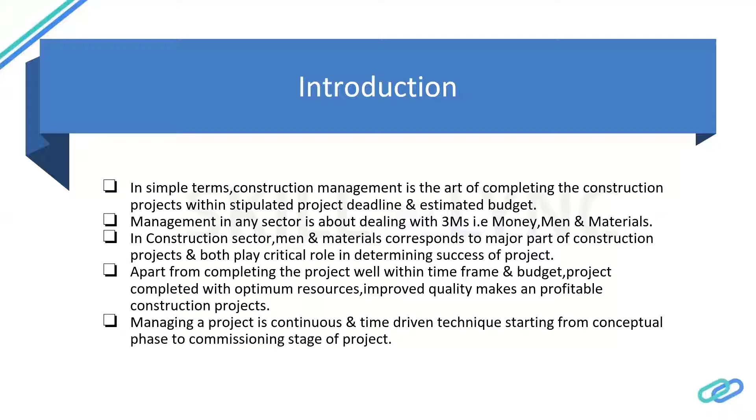What are the characteristics of a construction project? Every construction project is unique in its nature since it has different constraints and different site conditions. A project should have a definite scope as well as objective, and it can be divided into specified tasks, often termed a work breakdown structure. These tasks should have a specific start date and end date, a definite outcome, and require resources like man, material, and equipment.

Types of construction project: first is residential construction project. These types of projects include single-family apartments, flats, residential buildings, bungalows. The owner can be an individual builder, a contractor, or a joint venture, and it does not require much technical skill for execution. However, these projects do need proper licensing and authority for clearance.

Next is commercial projects. Commercial projects are multi-purpose buildings like office buildings, shopping malls, institutions. These depend on market conditions and capital requirement, and require much architectural and engineering expertise.

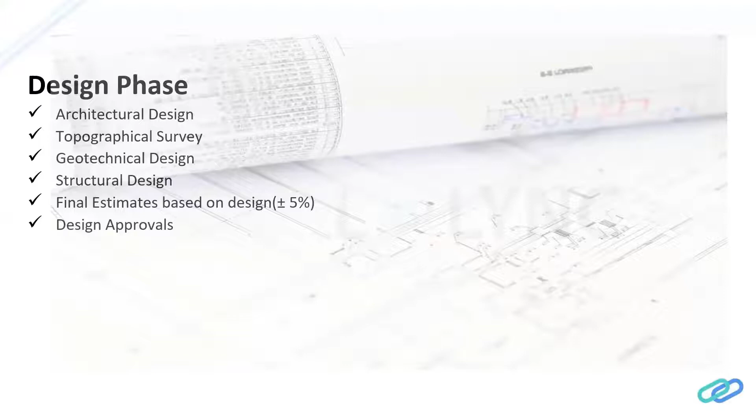Next one is the bidding phase. This phase includes project specifications and design. Construction documents include agreements, conditions of the project, and scope of the project.

We can have a pre-bid conference or meeting wherein potential bidders are invited and all queries regarding the bid documents are answered. After this, authorities open the bid. Generally, the lowest bidder of the project gets the bid and is requested to sign the contract and is awarded the project.

Next is the contract phase. This phase follows the bidding phase and starts after the contract has been signed and both parties are in agreement. The contractor is abided by the type of contract and the conditions laid in the agreement and specifications of the project, which can be administered by a contract or legal team of both client and contractor.

After signing the contract, the actual work can be started, which includes site clearance, clearing of any debris or unwanted scrap material from the site, leveling the site as planned, and excavation for leveling of the site. Then we can have the foundation.

After laying the foundation, we can have structural elements like columns, beams, slabs, etc. After the basic structure has been built, we can have our HVAC team, which is the heating, ventilation, air conditioning team, start their work, along with the plumbing department.

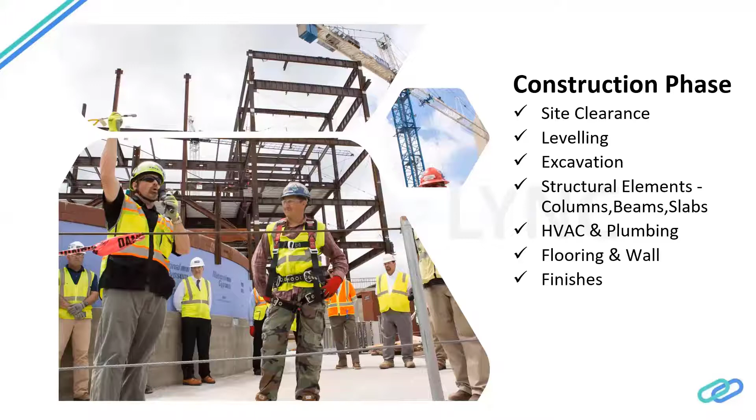This is the phase wherein we have the punch list. The punch list is basically the list of all activities which were proposed, has been performed and checked. Then we have O&M manuals, which are operation and maintenance manuals.

After operation and maintenance manuals, we have performance and service testing of all the services being installed in the building. If there is any defect, the builder is liable to repair the service within the defect liability period, which is usually 12 months to 2 years after construction.

The final phase of the project is closeout, wherein we revisit the project scope to see if it has been fulfilled, finalize the report and documentation of the project, balance the account sheet, run a cost benefit analysis, and finally celebrate the success of the project.

Now that we know the stages of a construction project, let's discuss the tools we need to effectively complete the project and to effectively do construction project management.

The first one is project administration. Project administration is basically the documentation work which we need for construction activities. The first one is the project delivery system.

The project delivery system can be of various types, like a design-build project system wherein a firm is asked to design and build the project, or design-bid-build, where design is done by another party, then it's bid out, and another contractor builds the project.

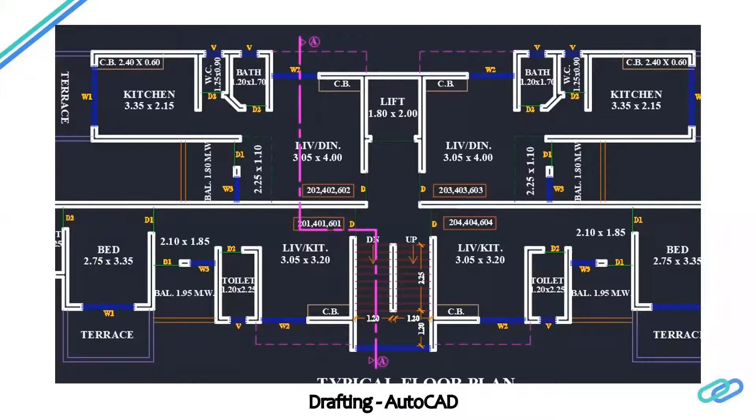Next is 3D modeling, since visualization plays an important role in understanding things in a broader sense and imagining virtually. Revit is the best tool for 3D modeling of structures to understand the project features in a better way. The background image is the 3D model of the same plan which we showed in the CAD drawing.

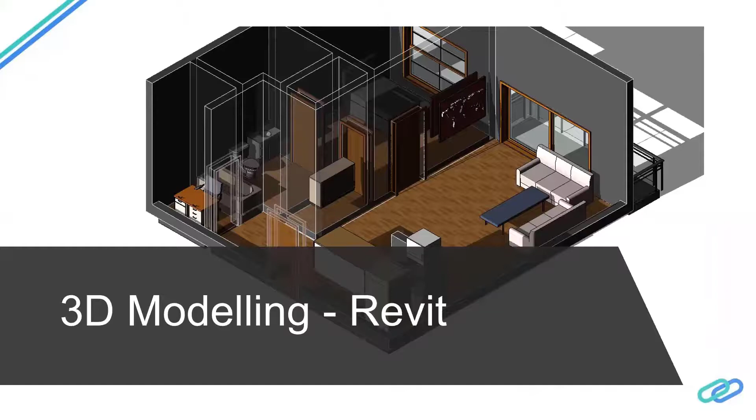Next tool is Primavera P6. I would just zoom into some of the components here to have a look. These are basically the activities, the work breakdown structure. Activities have been divided into certain tasks, which have an activity ID, activity name, original duration, start as well as finish date. We can have the resource requirement as well as which party is responsible for these activities. We can have a Gantt chart or a bar chart.

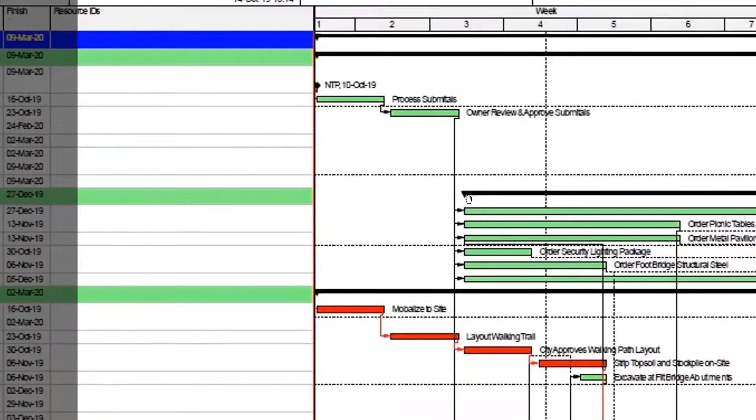Here we can see the resources, what all resources are responsible for these projects. This is basically a Gantt chart executed on P6 software, which is used for planning and scheduling.

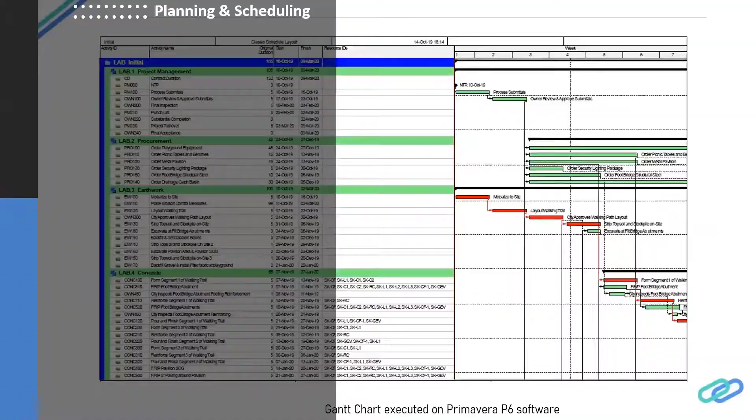We can use Microsoft Project as well for planning or scheduling the activity. Next, after done with planning and scheduling, or rather dividing the activities into sub-activities, we can proceed with quantity takeoff. Since now we have a plan, this is the image from Bluebeam.

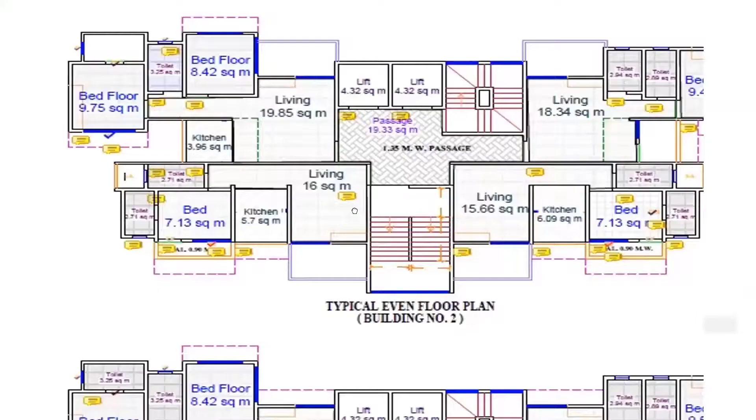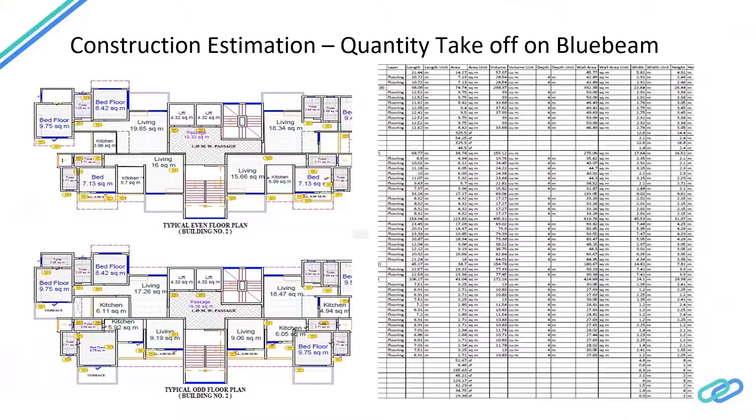Bluebeam is an on-screen takeoff software wherein you can get the plan and get quantities. In the software, we can get the exact area requirement, and then we can have a schedule of the flooring, the length unit area, what are the wall area requirements, what is the width and height. So we can determine the concrete requirement, flooring requirement, as well as the wall area to get the quantities. This can be done with any software tool like on-screen takeoff or Bluebeam, which is basically the most widely used software for quantity takeoff.

The next one is construction cost estimation. After taking out the quantities on Bluebeam, we need to have the rates. In India, we have different rates for different states, which are published every year, known as state schedule rates, so you can get that copy and get the rates of different components and labor rates, as well as different resources. In the US, we have RSMeans as a database for rates, or we have a different database like Sage 300 or Timberline.

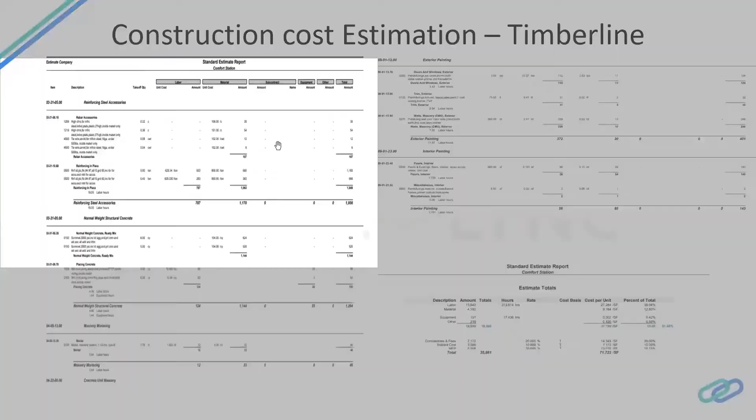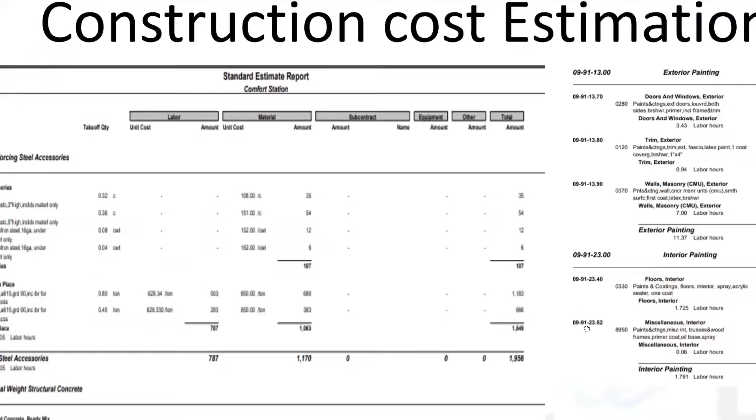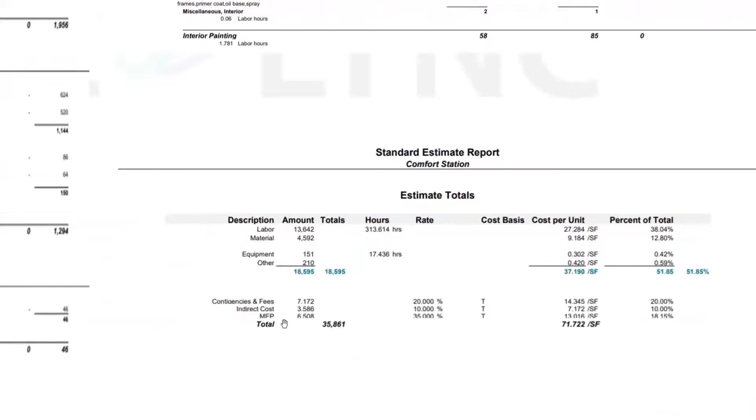This is basically a Timberline project wherein you can input the quantity of the component, and then the unit cost has been inputted in the database itself. Finally, it would calculate the estimate report, like the labor requirement, labor cost, material cost, equipment cost. We can have contingency fees, the indirect cost associated with that, and finally we can get the total project cost for the component.

The next important tool which we need to discuss while managing a project is risk management. Risk management is basically the study of risk associated with the project - identifying the risks associated with activities, monitoring and mitigation of these risks, allocation of risk, like which party is more adaptable or available for handling this risk, and the safety measures, which are very important in any construction activity. This can be achieved through sensitivity analysis, risk identification analysis, and risk management plans.